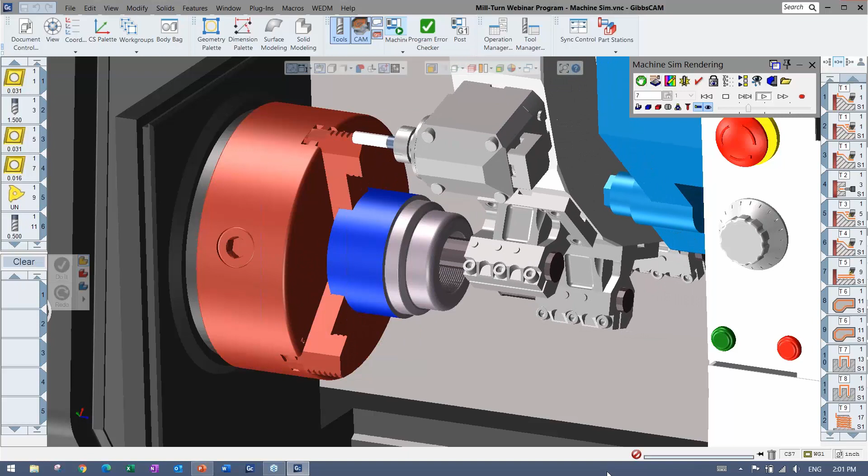I'm going to get right over to Gibbs here, and I have the part that I'm going to be demonstrating. You can see the full setup where I have a whole machine sim, the machine, fixturing, tool blocks, all the tools well defined. This webinar's purpose is just to show off how smooth and simple it is to go between milling and turning when you're using a machine like this that has turning but also live tooling in most situations. And in some situations, it can get even crazier with milling heads and lathes.

So we're going to focus in on a single turret and a single spindle, and I'm going to walk through and highlight all the little things. I'm not going to go too much into training mode here, I just want to get the point across of how it can be used, and we can go from there.

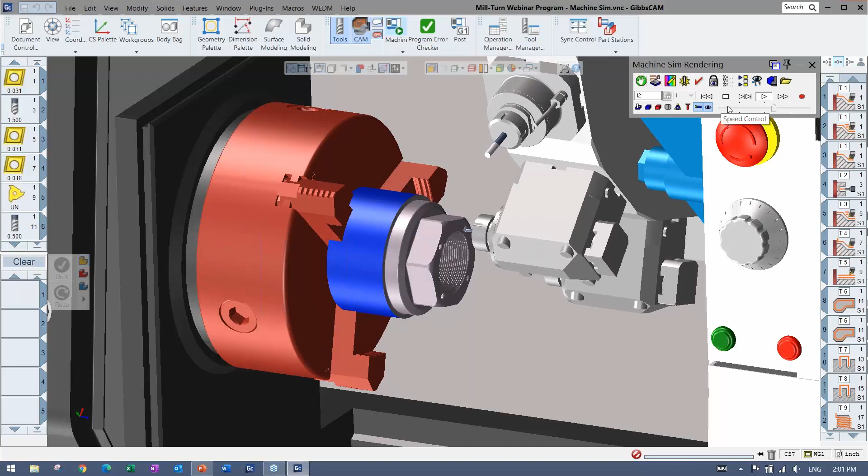The simulation itself, I'm not going to have that in the file right away, but you can get an idea here where it's really ops on the face, the OD, anything that you would expect to see.

All right, so I'm going to open up a file. I do have files that I'm going to be loading just to keep things smooth and running on time here. So the file really doesn't have anything done to it other than I've selected the machine quickly, and I've put in the stock and clearances.

I've even brought in a fixture here just to show you that you can do that. Bring in a model, download it, whichever, very easy to use. And you can hide it, it doesn't have to be shown at all.

All right, and I'm going to bring in a part as well. The part, when you're cutting something, can be a model like I'm going to bring in. I'm just going to import my part in here, and you'll see a solid representation of it.

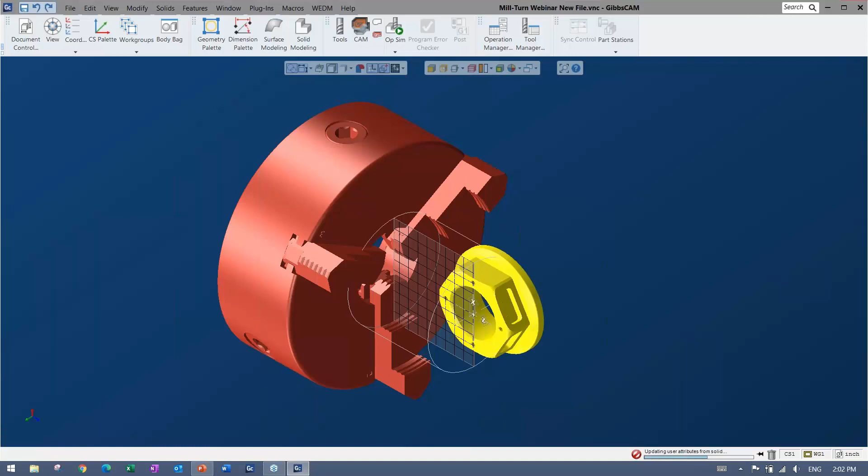But you can import wireframe geometry, you can draw wireframe geometry, you can dimension, model, all that can be done in GibbsCAM. So wherever you end up starting, you'll have something to cut in the end and to apply the actual tool paths to. You can see here everything's nicely defined.

Now once you have your part in here, there's lots of very good display preferences. You can hide things, show things, colors. Really the whole interface is very customizable.

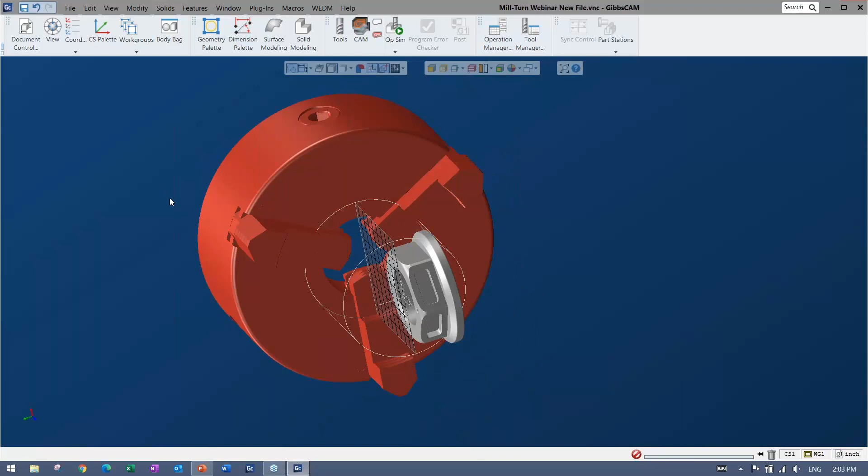Anything can be moved. So I'm using the default layout, but just know that as I go through, you can change it and add shortcuts and all of that good stuff.

Moving things around is also very simple. There's a view palette that you can use. I prefer to use shortcuts and my mouse or a space mouse. They're all available, and they can all be customized so that it's the same as other softwares too, which I find is very important when you're switching between them.

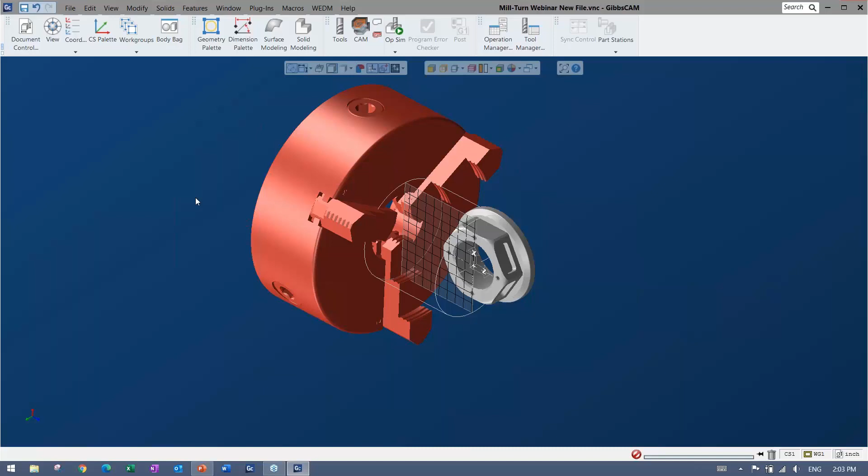Okay, so first thing I'm going to do is I have this chuck here, and I'm just going to send it to this thing called the body bag. So that's a little manager for the solids, and there's different levels as well that I'll get to when I'm engraving something. All right, so all the good stuff is there, and it's very easy to access here, even on the default layout.

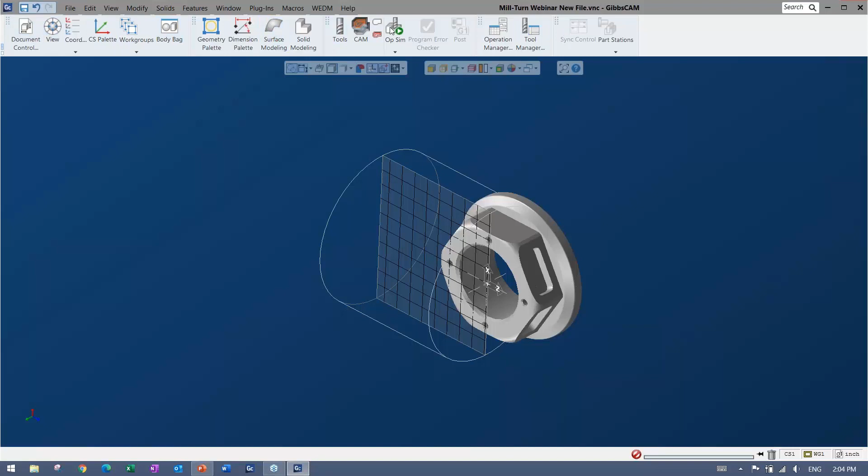Now, you can see my part didn't quite come in the proper way here, and there are plenty of tools to move things around, to locate your part, rotating, translating, all the good stuff, and some little shortcuts too. So this does come up for me, depending on how the CAD modeler has modeled things.

It could possibly come in the wrong way, and I'm just going to go in and bring up the CS list. So these are coordinate systems, and you'll see them come up again. But basically it's just a machining plane, and I can go ahead and maybe align this part to that plane, and it just takes some of the angle out of it.

Even if it was a severe angle, you could do a multiple lineup and line up to one plane and then the other, and then be ready to go and machine your part. So I'm happy with this, it looks like it's in the right orientation. There are plenty of tools to check it, but I know I'm good, so I'm going to go ahead with that.

Now I want to cut. So I have something to cut. Now I need something to cut with. So that's when it comes into the tools.

I find the workflow with Gibbs very easy to understand. It doesn't really change whether you're doing turning or milling.

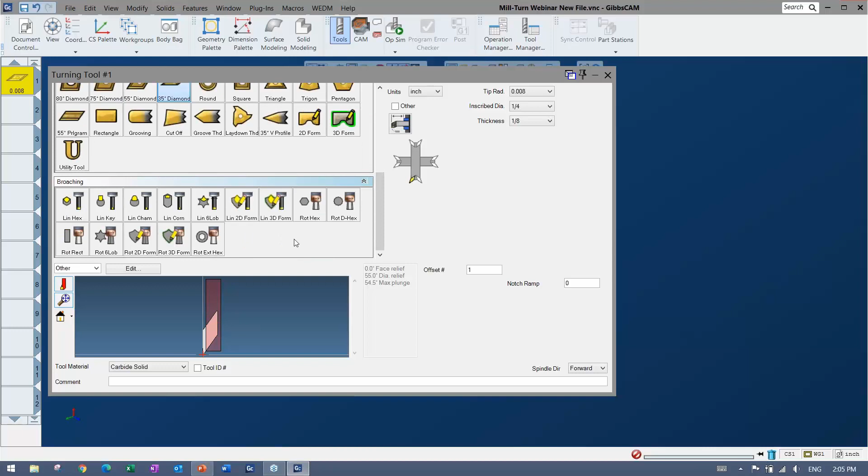You can see here that when I make a tool, the first thing you do is pick a tool form. In these cases we have some milling tools, so that would be live tooling in our situation. You have our turning tools, and we even have some broaching, linear and rotary broaching in there. All of these have a form tool equivalent, as well as the tool holders.

You can draw, import a wireframe or a model and apply that as your tool shape as well. Once you pick something, you fill in the size, fill in the holder information, and then give your offsets, and can give a little comment. Every tool is like that.

So if you're making a tool from scratch, it's very simple. It's easy to find your way around. Now, as you get into programming, the better thing would probably be to have some way to bring in tools. I'm going to be doing that coming up. So you can definitely load tools and all that good stuff as well.

Let me just pick maybe a standard insert here. Tool holder on it there. And you can see the preview is all nice and 3D as well. Boring bar.

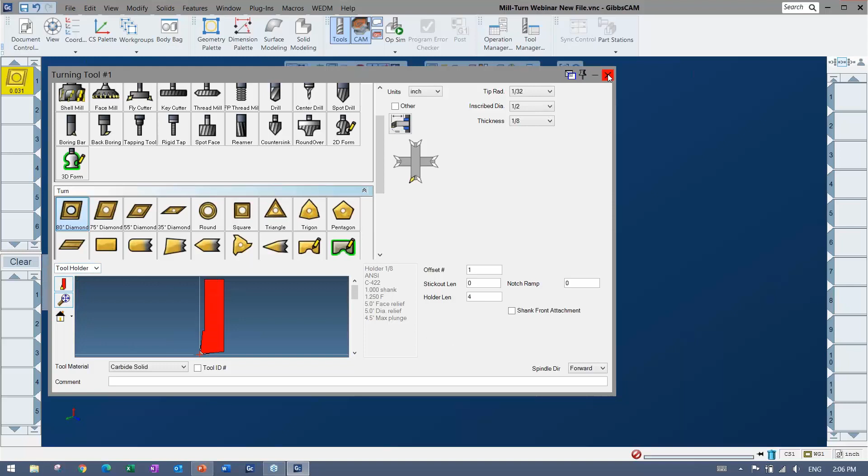So once you have a tool, whether it's a milling tool or a lathe tool, you bring it down to what's called the process list. And this is really where everything gets added together and set up before you actually make it into a toolpath.

Now, depending on your license, you may or may not have everything that you see on my screen. But this is how it works, where you either drop your tool down in here and get access to the process types, or you can go the other way around and double click here, select a process type, and it will filter through all the tools it thinks you can use.

And you pick it, and then it all gets there in the end to a dialog that would set up whatever your tool path process type is. So whether I'm doing a contour here or roughing, threading, there's elliptical contours. There's a process for pretty much everything.

So we're going to stick to certain ones here, but if you don't see the ones that you wanted to see, then obviously you can put in a question or ask your local reseller.

Now those as well are loadable. So the best way to do it, I mean, you have to make your tool most likely at some point, but I actually have my tools and my processes created, again, to keep things smooth and keep things under the time limit. So you can load tools here, and there are tools that you can save yourself.

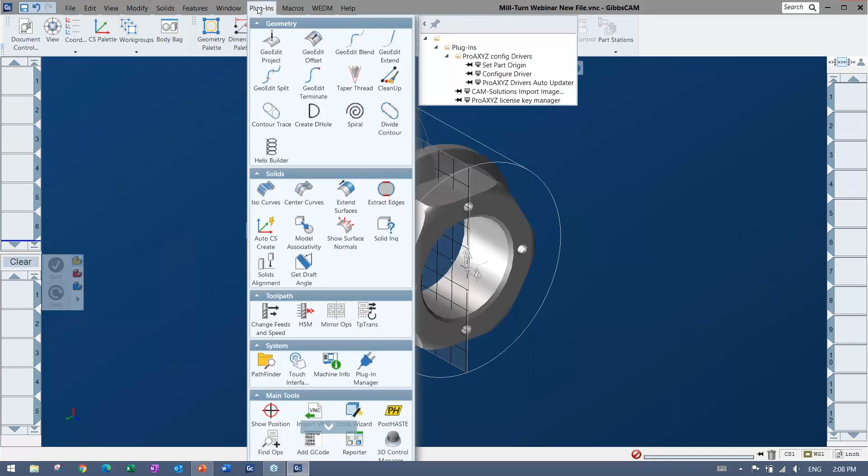You can also use different plugins, like Sandvik has CoroPlus. There's also the Helical Solutions and the Harvey tool libraries here, and some other solutions for that as well out there. So in that case, maybe I have a process already set.

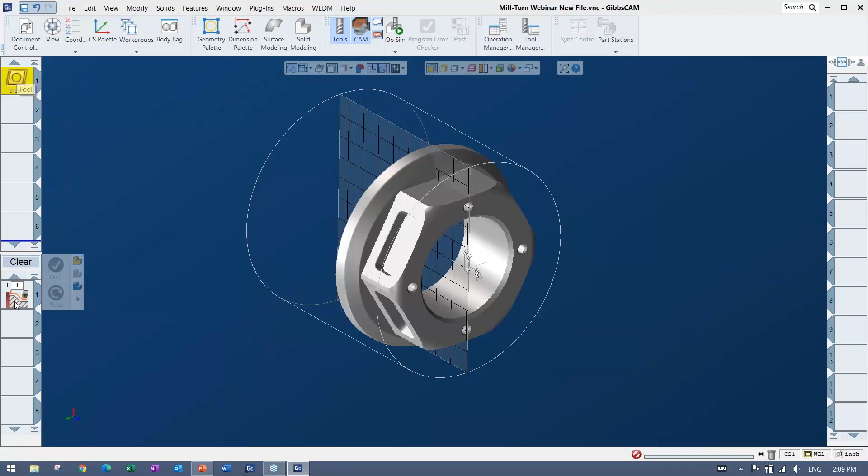You can see here I've created a folder, just Mill-Turn webinar, but I'm going to go ahead and load out of that. You can make your own folder system by machine, by material, by tool type, whatever you'd like. And when you load it in there, if I load a tool, I get the tool. And if I load a process, I get the tool along with all of my parameters filled out already. That could be anything from feeds and speeds to what type of process or cut you want to do.

So the one that I've imported here is the facing process. We're going to put that onto our model. Again, the workflow is always the same. You'll see as I go through: make tool, drop tool down, pick what the tool does. You get a dialog, everything's all in that dialog—no hunting around trying to find different things. And once things are filled out, then you can apply the actual toolpath to the part.

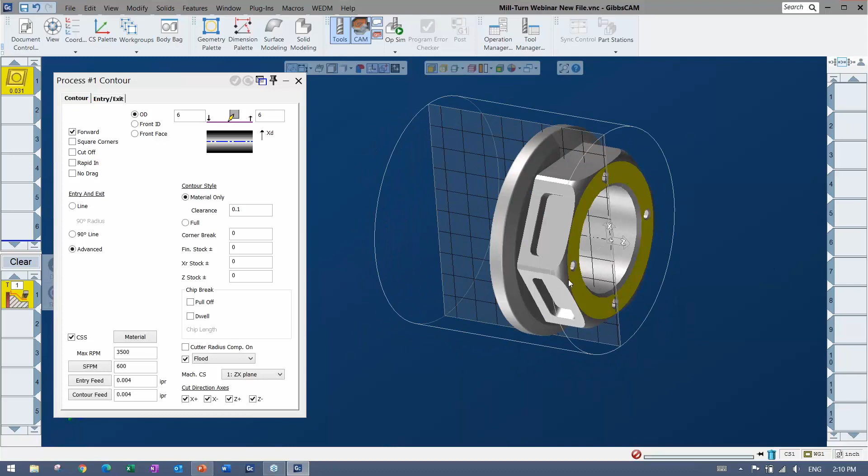So that's the place I am at right now, and depending on what process you use, there's different things to select. I could be selecting the model, or selecting some wireframe geometry. I may extract some geometry from the model. If it's already drawn, I can use that.

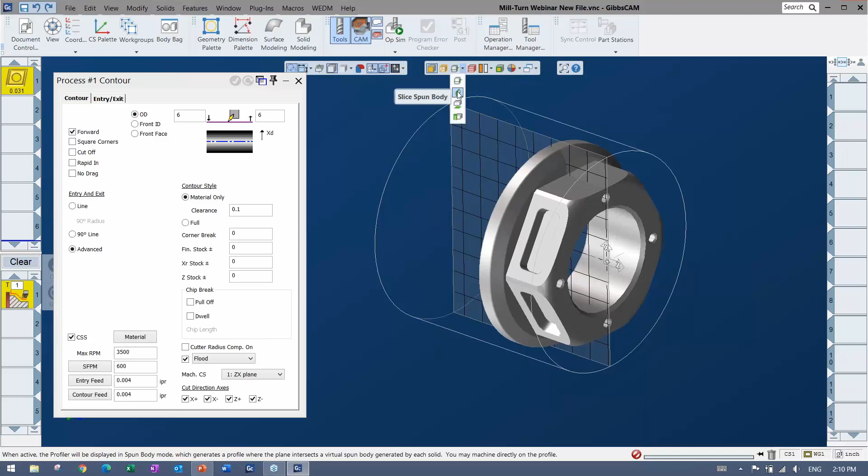In this case, I'm going to bring up something used to turn on solids. It's called the profiler, or the slice plane, and it has a certain mode. If you see the slice plane as it is, it slices through, but that's not really what I want to use to turn this part, because if I turn this, it's going to gouge in the higher areas.

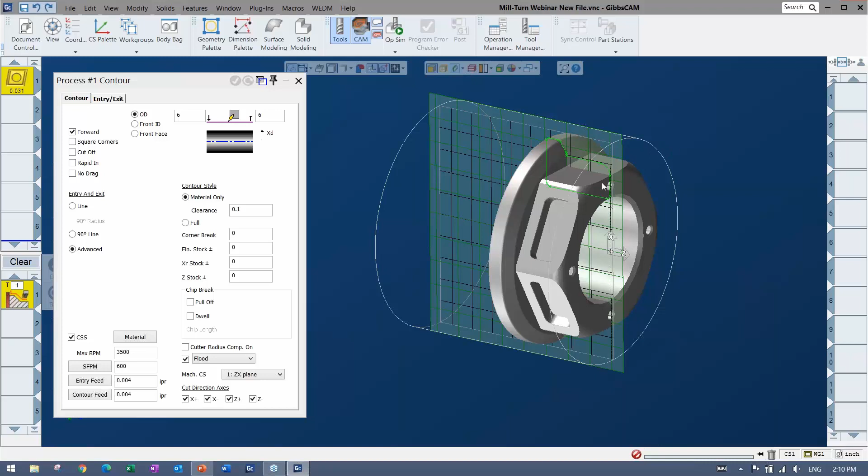So what I'm going to use is slice spun body mode. That one's great because you can never bring that slice plane off zero, off the center, so you know your diameters are right. You can also see it's showing all of the highest points, and getting rid of anything you can't hit while the part's spinning, like these holes are not being sliced anymore.

You can extract geometry off of that, or just go right in and use the profiler. That's what I'm going to pick for this specific toolpath. So a contour or roughing, anything with a specific shape, is usually going to need some kind of a profile like this or a model.

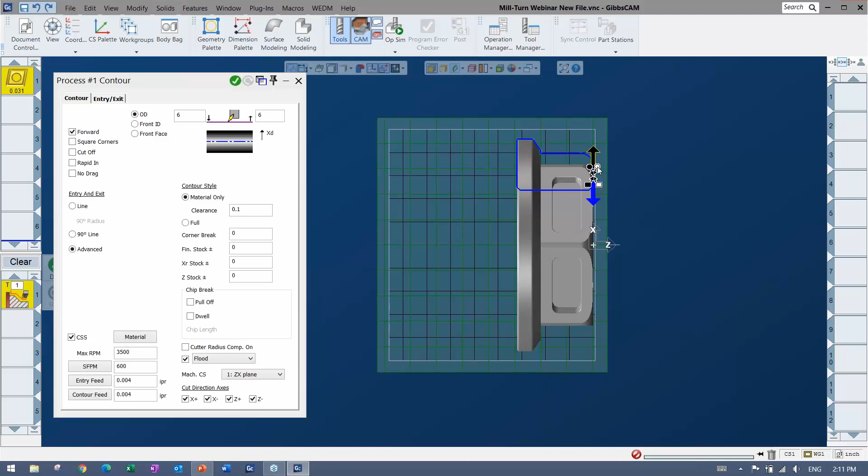Now when applying, our lathe processes use these start and end markers that are quite easy to use. That's just about where you want to start and where you want to end and what direction you want to go, and whether you want to go all the way around or one skim on the face, like this.

I'm ready to do the toolpath right now, but I'll mention you can move these by specific amounts and all that. I'm just going to place things where they are and rely on this material only to prevent any air cutting. Even though I drag this up here, when I do the toolpath, you'll see it avoids that.

Now once I'm ready to make the finished operation, notice my list over here, the operation list, is empty. So I'm going to go in and either say do it, or anywhere I right click, there's a do it. If I click that, you can see the toolpath appears, and I have my finished operation on the side.

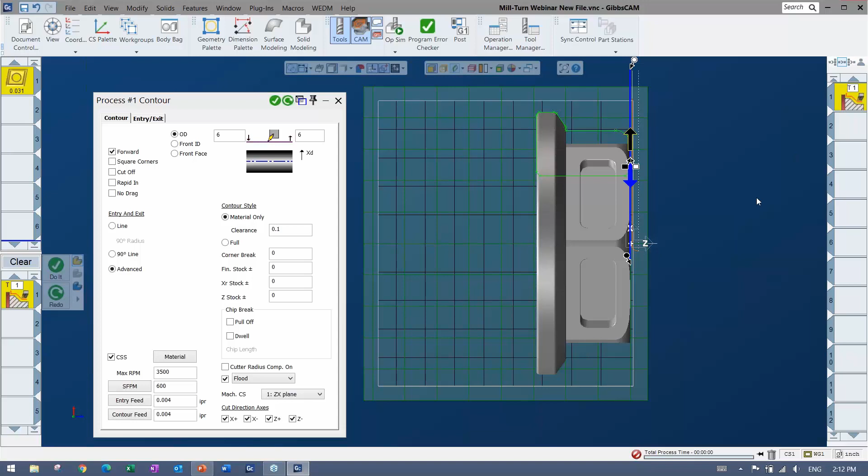Now if I wanted to change something about this, that's when redo comes up. There's redo, which will recalculate the toolpath based on whatever changes you made. So if I didn't want to go down as far, you can see that it shortens that up. But once again, it knows there's material being removed, so even if I drag it past that center mark, it doesn't go past. I can always override that as well.

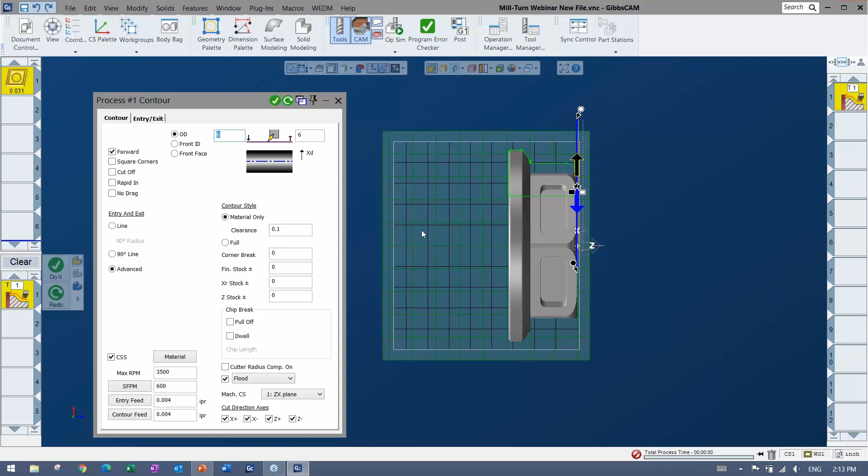So that's the gist of adding the toolpaths, and I'm not going to go into much about what each thing does, because I get into training mode sometimes. But I'm just going to clear this off and go ahead and check out the simulation now. So we have an operation, and I want to watch that.

So what I can do is start my sim, and there's a couple different simulation modes. There's the one with the whole machine and everything, and then there's the one that back plots. You can rewind and play, and this one's also nice, called OpSim, which will show whatever you want to play with, tons of useful options. I'll bring them up as I look through the rest of the toolpaths—stopping anywhere you want, different colors, checking to see if the simulation matches the part, etc.

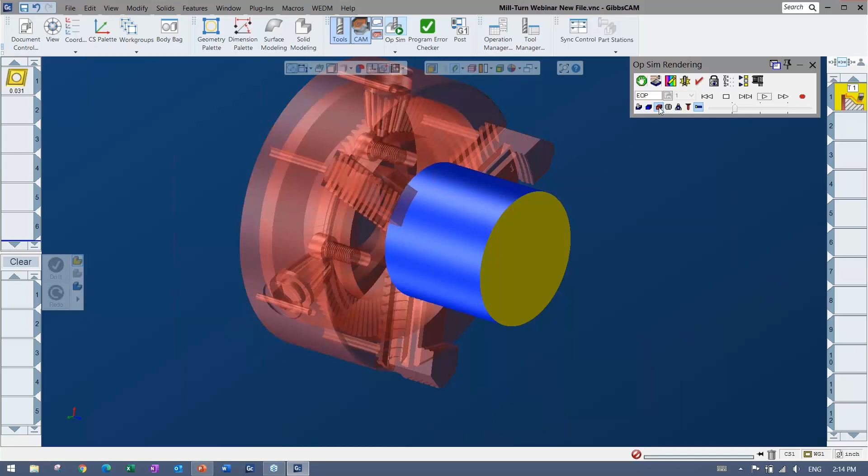You can see, even though my fixture was hidden there, it's showing in the sim, and I can always turn that off as well, or make it transparent or anything like that. You can see I have every little part in there of that fixture.

So I'll pop in, and you get to the point where by just looking at the toolpath that's probably going to be fine. And if you see a little line going right through the part, then that's probably when it's bad, but I'm going to try not to do that.

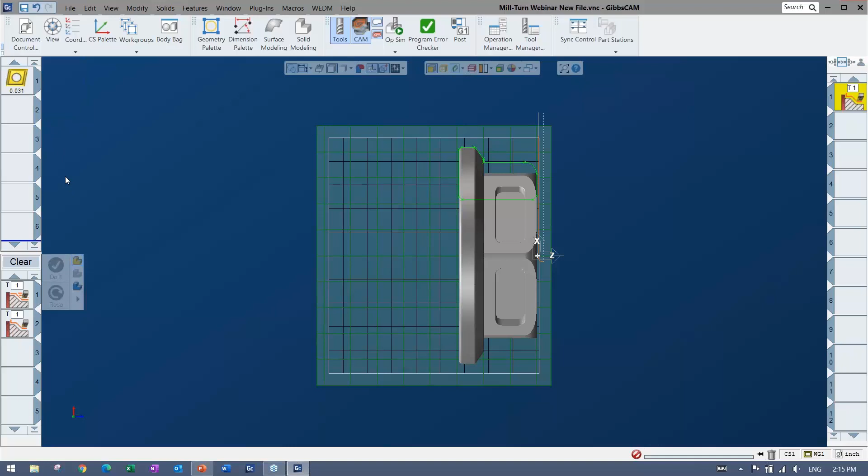All right, so I'm going to load a couple more in here, and again, not going to dwell too much on it, but here's some roughing and finishing, let's say. You can see these are stacked together, and they'll apply to the same selection that you make. You can do roughing and finishing tools separately, but here you can see that one's using the same tool and it recognized that, so it's not going to make me another duplicate tool. This one's going to go ahead and rough this in.

All right, so I'm going to start picking things out here, and depending on what you want to rough, there's little shortcuts. You just do something like that, and that selects everything that I want to cut. And I can say do it, and you can see it generate the cut there. I have 2 more operations.

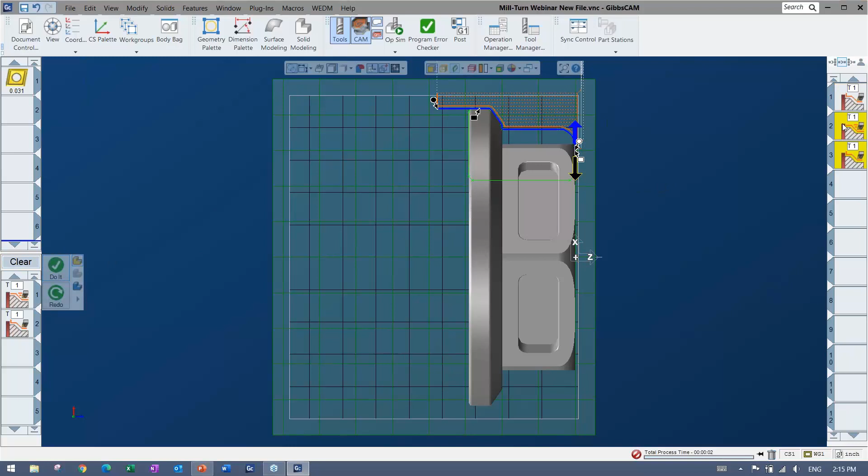Again, I can pop open the simulation if I want. I can play it, and I can check, is that okay? Anything crashing at all? I actually put on this one, it's hard to see, but there's a chip breaker. I thought about using the pull-off, but there's lots of options in there once you start digging that you can use, but nice and easy.

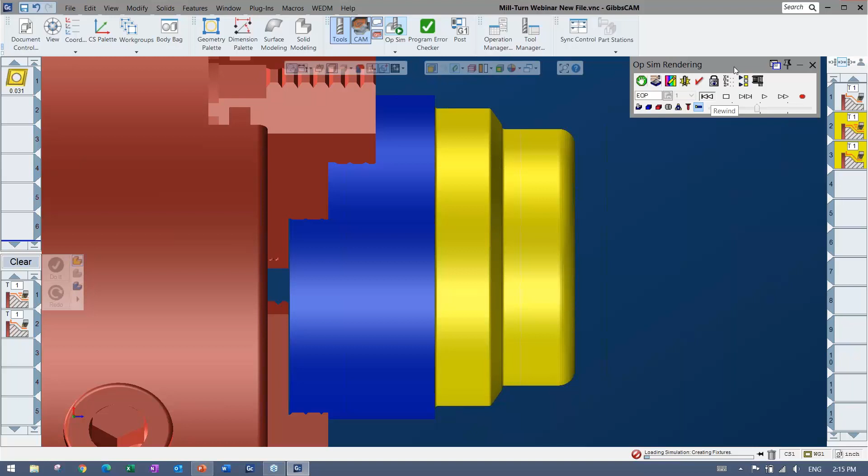I got my thing, my OD is turned, my face is turned. Again, this is a demonstration, so don't give me too much stuff about the actual methods. I might cut things differently in other situations, but let's move on to doing a little bit in the middle here.

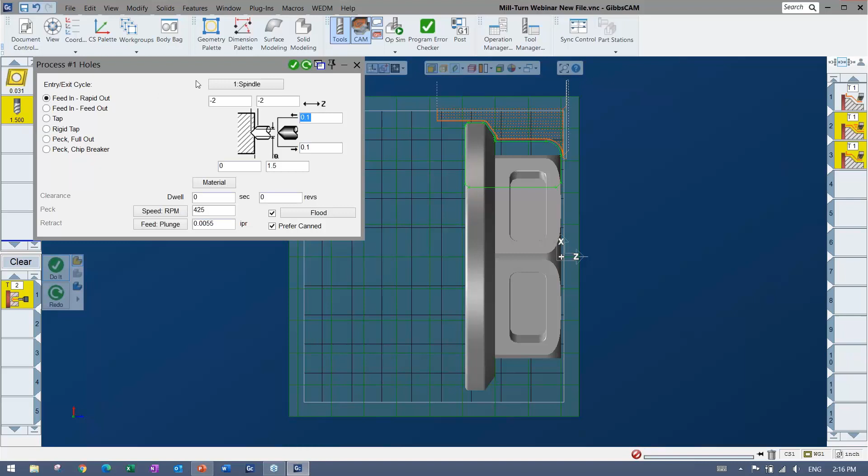So here's an example of one process that doesn't even need anything to be selected, right? What it is, it's actually the U-drill in this case, but you can see here when I have a tool that can do both, I have live tooling drilling, and then I have on-center with chuck spinning drilling. One's going to give me the on-center, and that one obviously can't go anywhere but on-center, so I can just go ahead and say do it, and I don't actually need to select anything.

I'm going to go ahead again, maybe I'll do some rough and finish and threading. These guys, if you're making them by hand, then great, but definitely save them if you can. If you use that same material, especially those same tools all the time, you can even have your whole tool list in here and possibly your whole machine sim set up before you even have any kind of thing going on, where you might have a template file you don't even have a part in and you never change your tool locations. That's all doable, all doable.

And here again, you can see the material only, picking up that there's material back here. And again, if I didn't want to go back all the way, I could always redo, just kind of shore it up, and it's very quick to just redo with a redo shortcut.

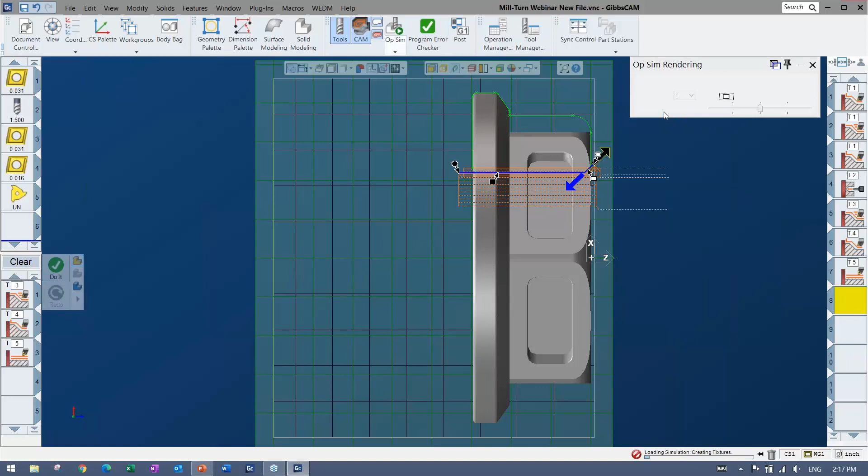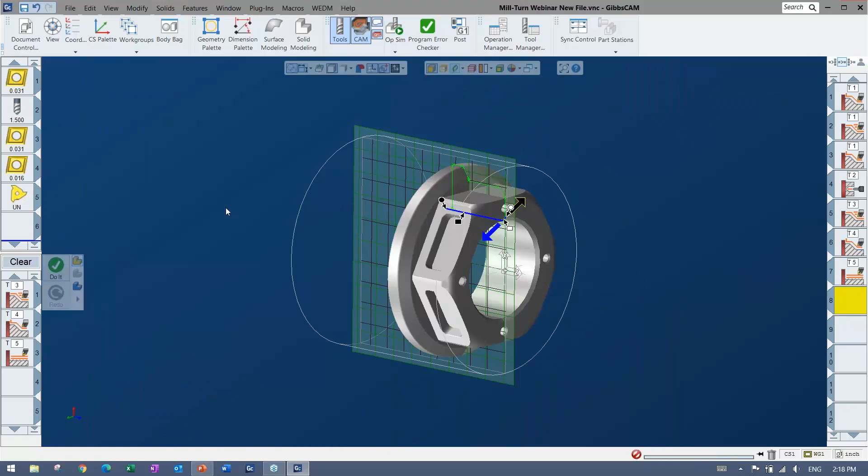Again, checking all the way if you want, or doing the whole program and then checking is perfectly fine. But for any inner diameter work, you can see there's a little cutaway, so I can actually see what's going on inside. You can see that, yes, that's cutting, and then obviously looks like the thread's going on in there. The transparency could also be used as well. I'll play it all a little slower when we get to the end there.

But next up, let's do some actual live tooling. So you saw that the turning was very easy to put on. It's just one plane, easy to set up. But I don't have to jump into another side of the program or anything. If I want to start milling, I can just go between milling and turning all I want. I can reorder the processes or operations if I don't like the order that they're in. Anything like that is doable. It's very easy, and reposting the code is very easy as well.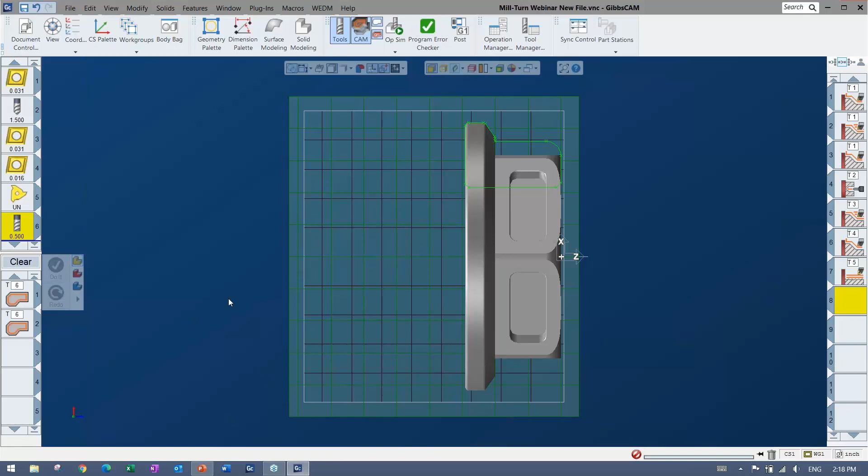So I'm going to go ahead and rough this hex out. In this case, I'm coming in on the face, and you'll see the tool is very easy. This is now a milling tool, but again, you're just picking the form and putting in the dimensions. Offset's a big deal, obviously, and tool holder can be in there. I don't have tool holders because the machine sim tool blocks are taking care of that. But this is the main thing I wanted to bring up, where you just have a little indicator where you want to point towards.

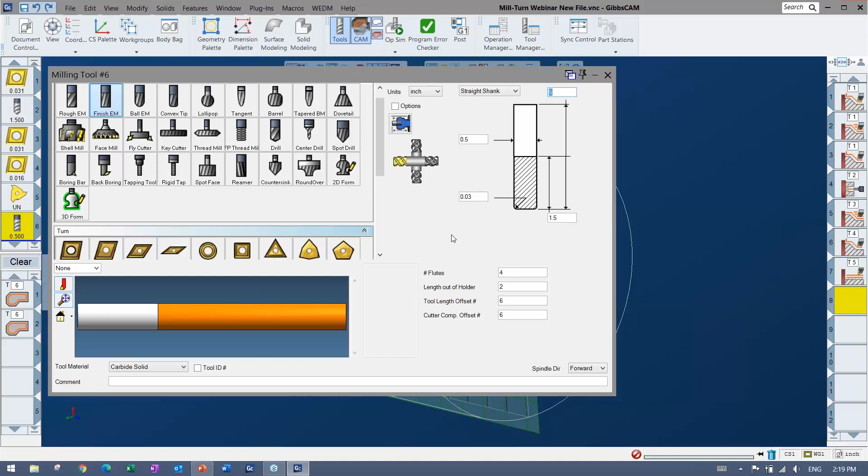And these ones kind of allude to some of the more advanced machines where you might have something like a sub spindle or a lower turret. So I have this guy pointing towards the face.

In my actual process setup, this particular machine - I can always make more CSs, but this one has CSs created already, and you can see that this is going to be done on the XY plane instead of the ZX plane. So I'm going to go ahead and say, get on the XY instead, please.

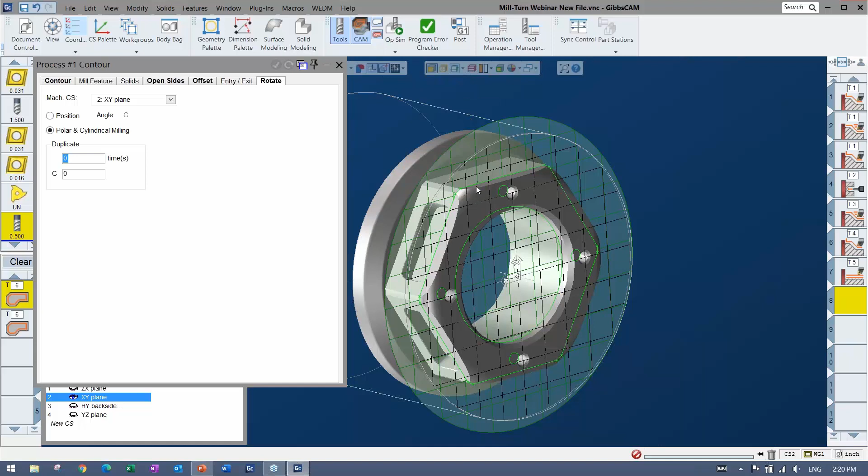You can see that I've also switched the mode to slice plane, so I can easily get this geometry. Maybe I'll just start here and end there kind of thing. Again, you can put them in precise amounts and all that kind of good stuff as well.

And when I do that, you can see it's deployed processes. Again, everything I'm throwing in are paired up, but they don't have to be. If you want to separate your roughing and finishing one by one, that's fine too. Or you can throw them all in there if they match, if they go together.

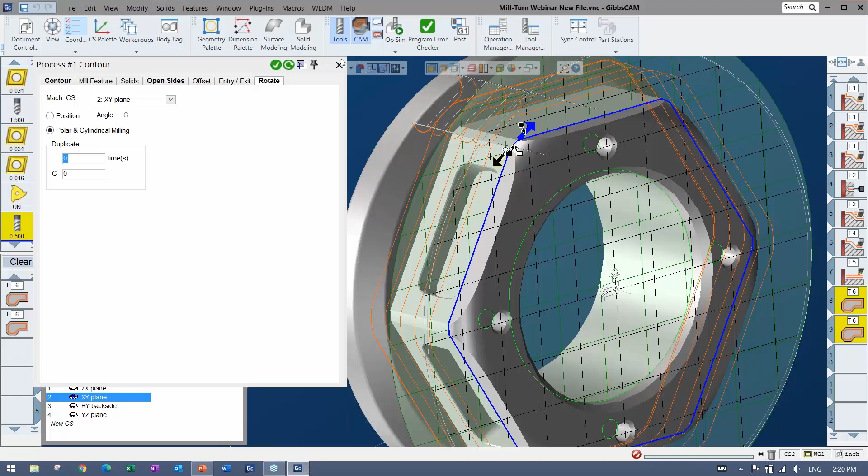Things like spot drill tap, and you never have to look up the pilot hole size anymore. It loads in with all of the right feeds and speeds and everything. So nice and easy. And that guy's going to hang out there, and once again, I can come in and simulate.

This is where we have a specific option that we could go between. So why don't I go ahead and skip to this operation? I could do a couple things - I could either select to just go all the way to this operation or buffer to this operation, or I could just simply play the selected operations here. I'm going to watch it.

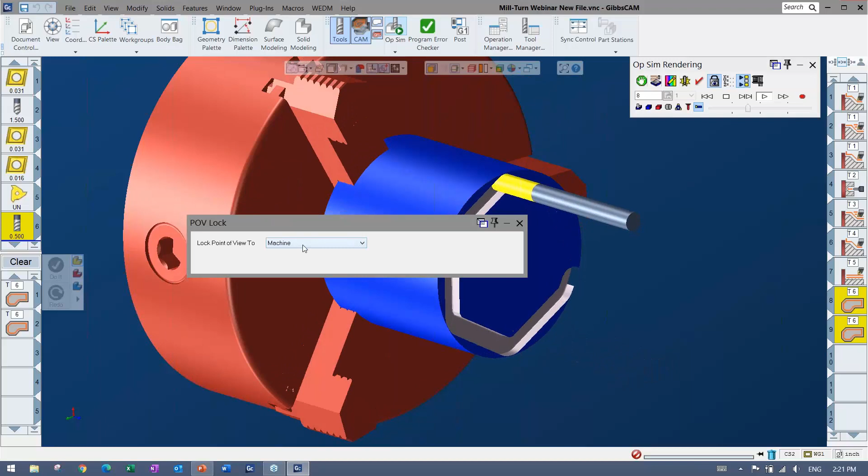And this is having to do with rotary milling, so this allows you to watch it as is if you want. Or I could go ahead and set it so that the machine is actually doing the motions it would do, and you have this, which would be the C-axis interpolating, and you're doing more rotary milling or polar and cylindrical.

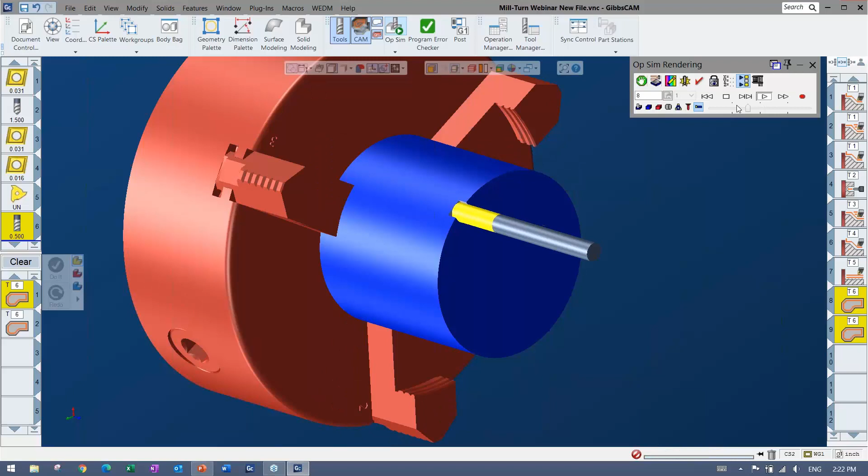Or if I wanted to change that at all, I can just come in here, and literally it's just one selection where I can set it to the position instead so that it does X, Y, Z if possible. You can say no axis movement - didn't have to repick anything, didn't have to do anything special other than that one option that I changed. Now it's using the X, Y, and Z, and you might use one day and one the other. It depends, and if you don't have a Y-axis, absolutely a must.

So that hex looks good. I have the rough and finish process there, so that should be good and ready to go. We've got a couple more holes on the face here. I'm going to come in here and do a little thread milling.

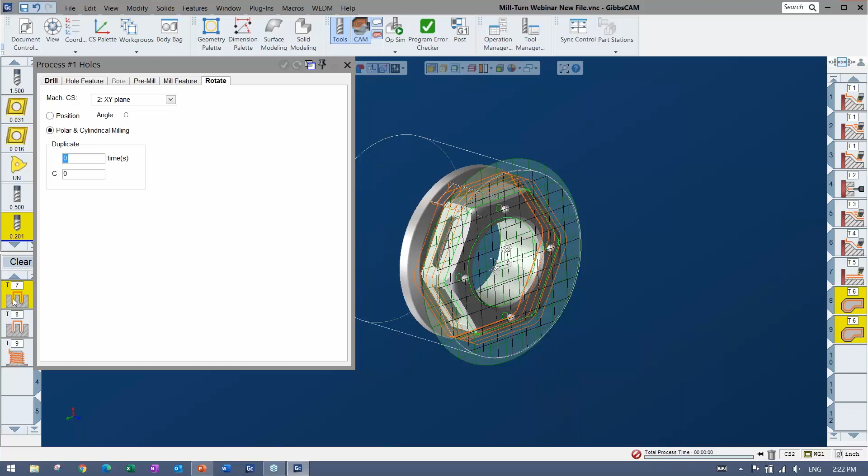Once again, just making sure we're on the XY plane. I have a drill, I have a chamfer, and I have a thread mill. I already have the profiler selecting what I need, so I'm going to go ahead and just grab those. And there you can see those three that went together and were already set up maybe from last time - I've just made my life a lot easier.

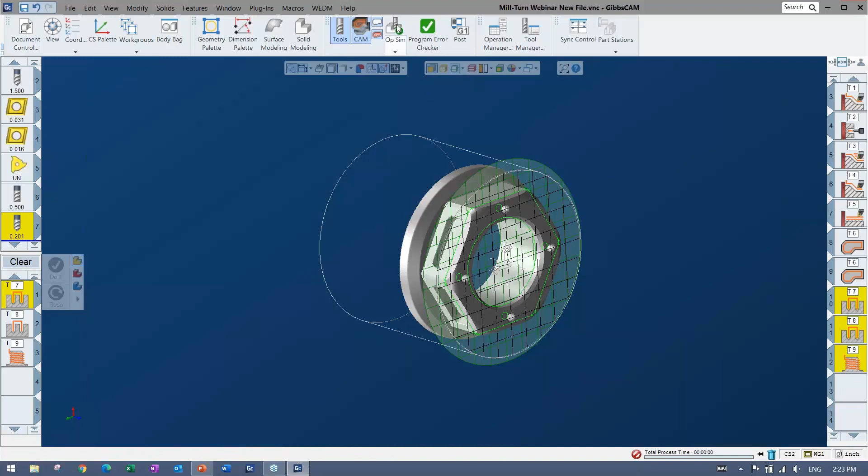Again, same kind of thing too, where I'm coming in here and I can simulate and watch and see if I'd like to change anything about it. But this again would be a good one to do the polar and cylindrical, keeping that turret up in the positive here and coming in, spotting, and then you can see here the full profile thread milling, which is another thing totally supported, very easy to use.

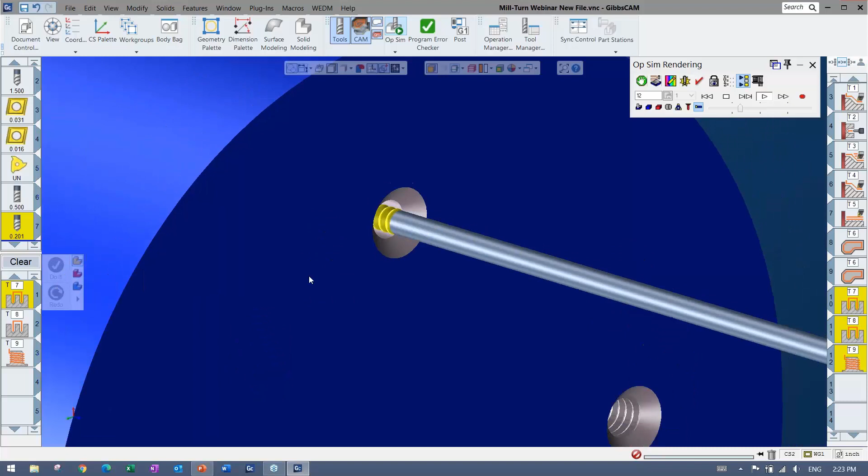Again, just making a thread mill tool, dropping it down, choosing thread milling, filling in all of the parameters. That's using the C-axis or the positional once again.

So this part's coming along. That's about all the face work I'll do on there, but obviously we could be also coming in on the OD, so I'm going to go ahead and load something for that. And the first one is the pocketing on the outside.

Once again, if we take a look at the tool, nothing really different about the tool other than it's a smaller tool, of course, but we have it sticking towards the OD now.

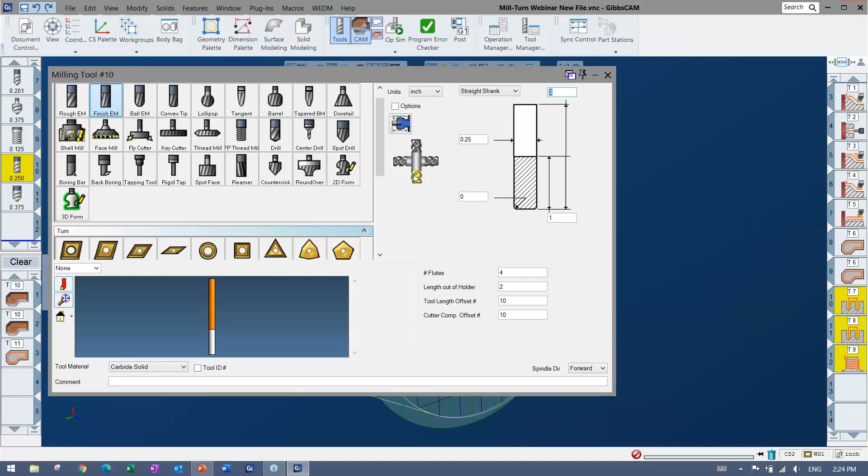The worst thing that can happen is it makes the tool path, then you simulate and see that the tool is the wrong orientation and you change it, or a warning comes up saying the orientation couldn't be achieved. So that's not a problem at all.

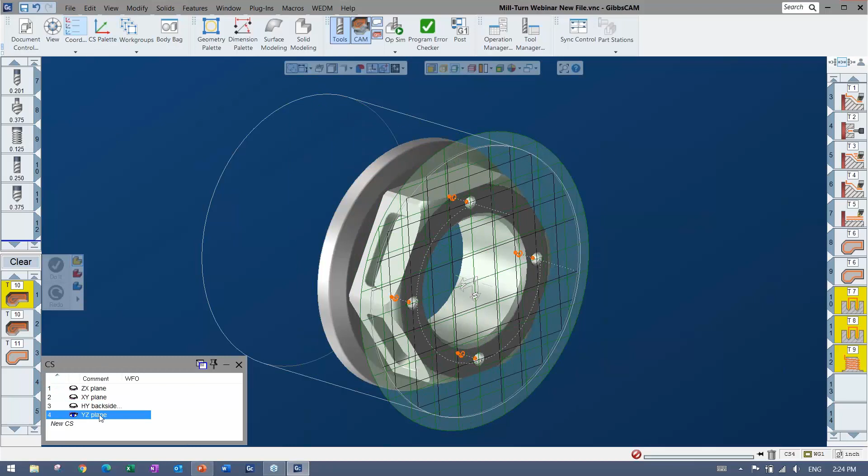Now, if I look at my planes here, I don't actually have a plane that would angle to that pocket. If I take a look at any of these, I'm either going to have to use an angle option that I'll show you in a second, or I can go ahead and make a new CS plane. It's very easy - in this CS list, I'm just going to hit new CS, and maybe I'll go ahead and call it pocket here.

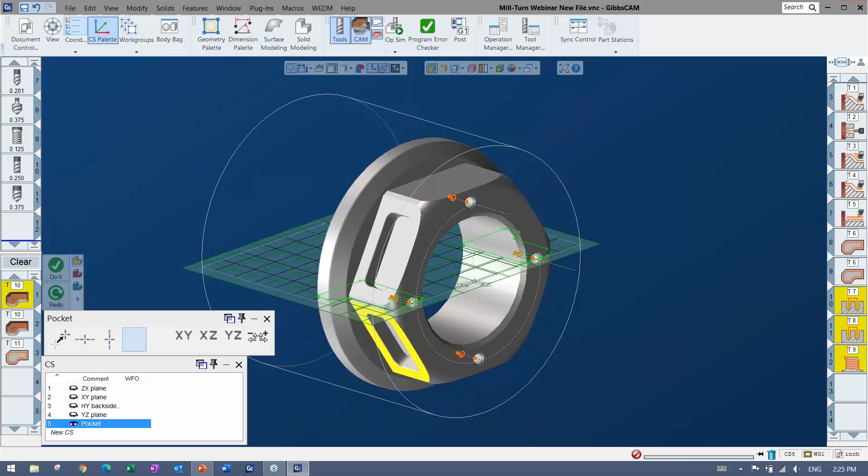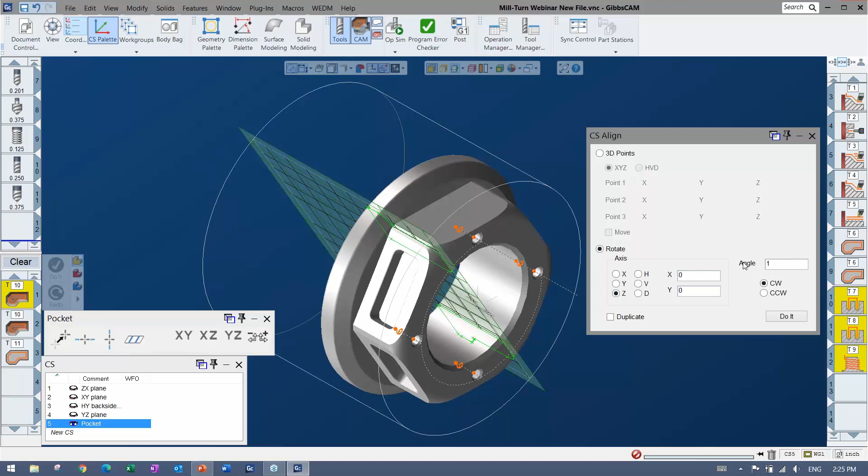I'm going to open the CS palette, which actually creates the CS, or moves the CS I should say, and I'm just going to go ahead and align it there. You can see, depending on what you have, there's a negative and a positive, so I can always flip, or go to the other side, whichever works for me in that situation. I could also do a rotate, maybe a 180 rotate around. You can see all I'm doing is putting that so it's on the positive side.

I'm going to do it off the ZX plane. Let's do that one there. Pocket. My profiler adjusts to it.

So I can again reposition that to take another slice of whatever I want to cut. And then inside of my process, I can say, hey, there's my pocket CS, or whatever you want to call it, the angle that it's coming in or what it's doing. Select that. And also notice that I have a duplicate here.

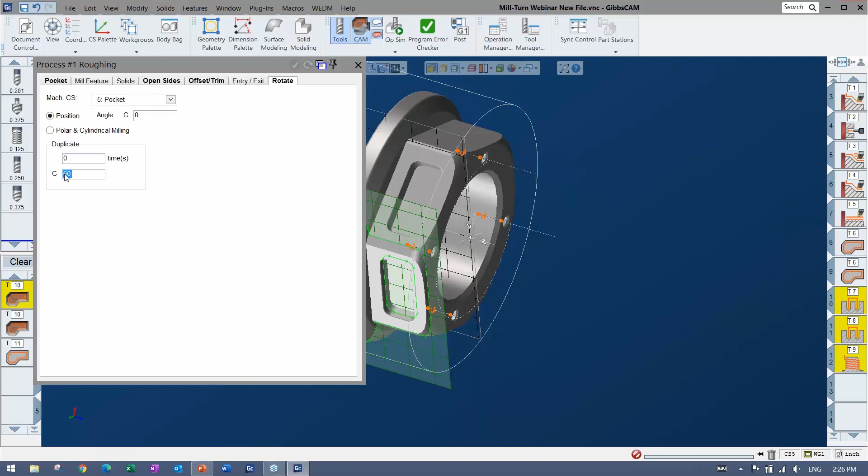So maybe I'll just do it without the duplicate first. Oh, and I still have a duplicate in the other one, but you'll be able to see here - I'll turn them off just to get the point across. But basically, however many times that pocket happens around this part, I can always say, hey, duplicate this same feature around however many times I want by whatever angle. It makes it really quick to create instead of doing another CS, even though that's pretty quick too.

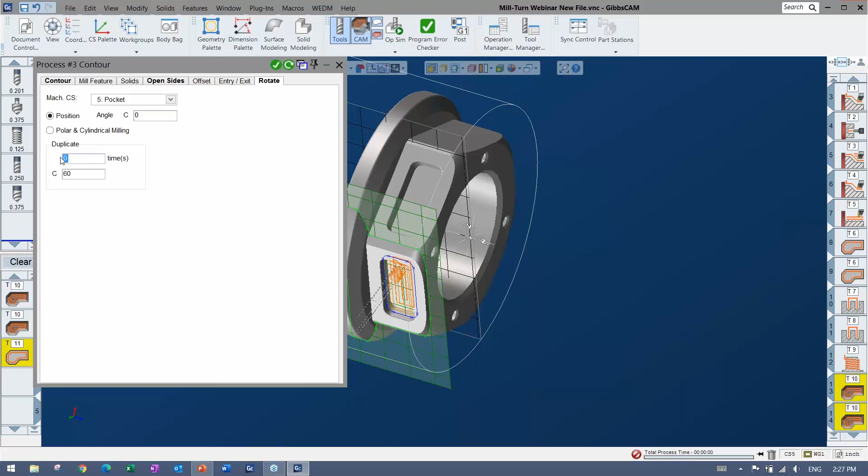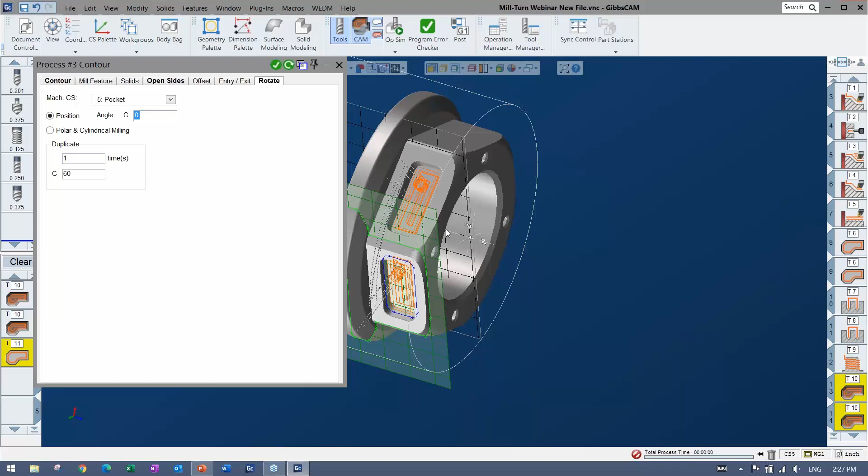So if I said 1 times 60 in these cases, you can see that's been duplicated and it will cut both. Now the order depends, but you can always reorder on the op side, or I can also put specific angles to start from. In this case, I actually have those same pockets on this side, and those are 180 away, so it's possible I could do a 180 here instead of a redo to create two more processes here. And I forgot the 180 in the other ones.

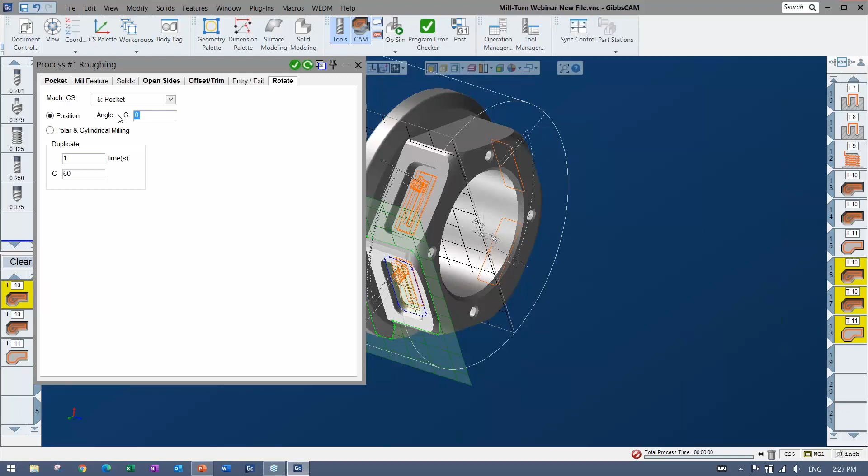So no matter what you were doing here, however many angles, if it's a weird angle, if it's not equalized all the way around, there's a chance you can get to it using this, or obviously the coordinate systems are always there and very easy to place, especially if you have a model.

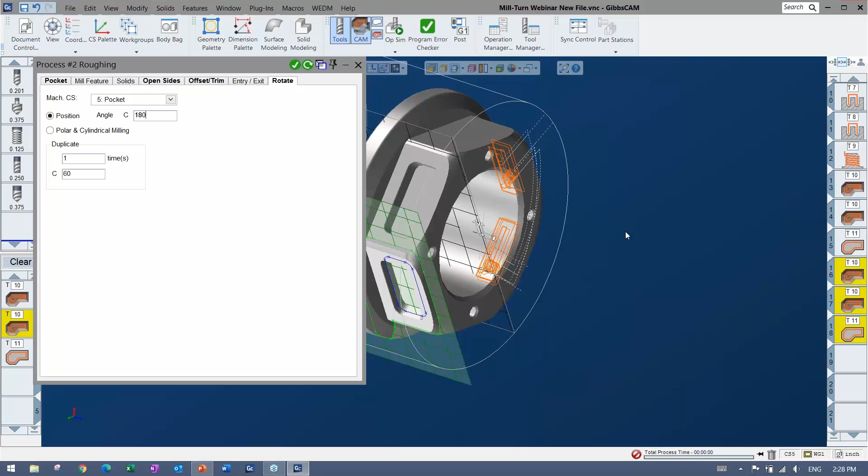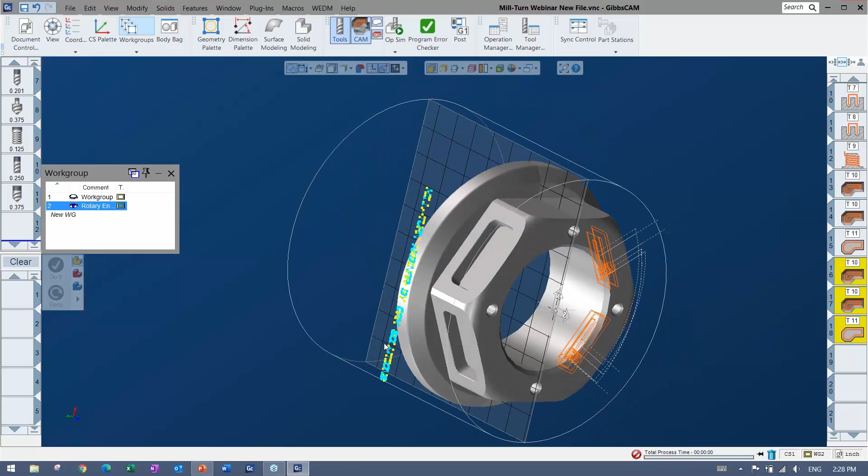Now, one of the last things I'm going to show you here are the rotary milling once again, and I actually have some text in a work group here. Here's some text going along there. I'm just going to switch over to that coordinate system and basically wrap this text around because I want that to be written around with rotary milling.

Very easy - once again, it's just like you're doing a straight contour, but you're going to be doing a polar and cylindrical. If I load up this rotary engraving, it's a normal, just regular contour, but I have polar and cylindrical. And maybe I'll do that one again, 180 from there.

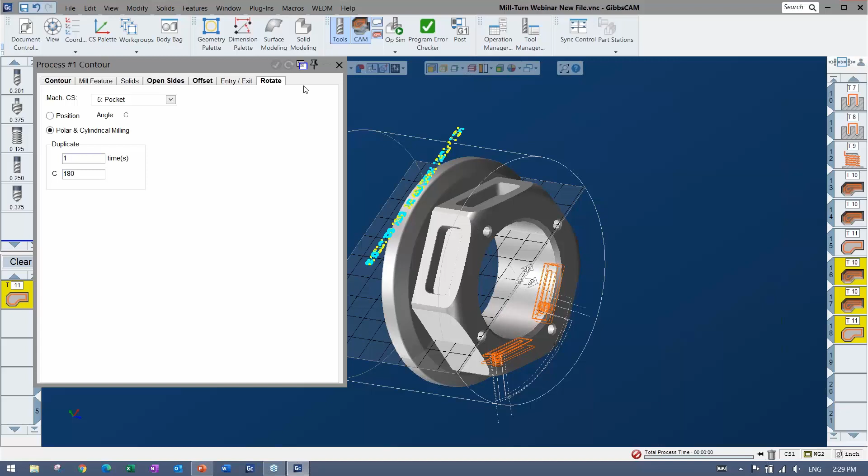And selecting, I mean, there's lots of different methods of selection. I'm going to just turn off the solid, let's say, and select like that. And say do it - that's going to write them all down and wrap them there around like so.

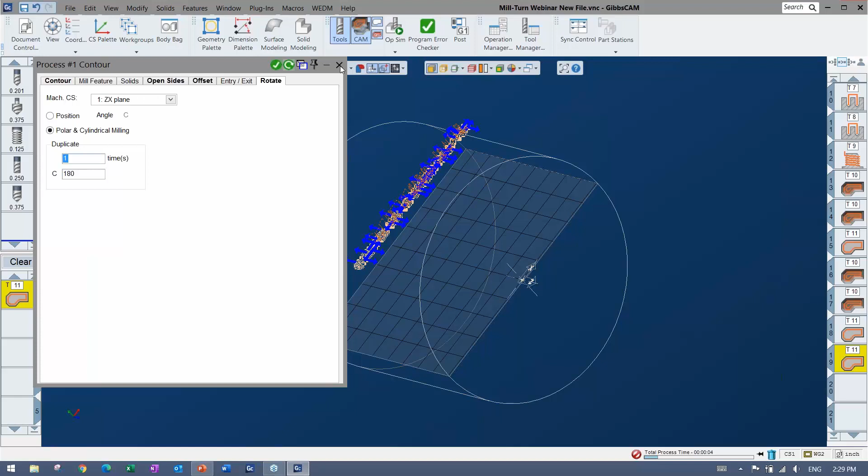So I'm going to go ahead and play out to that. Maybe I'll use this one for that. Again, I'm going to start or stop before operation 19, let's say, and I can turn that on, and that means it's just going to play as fast as I want. Then it will stop at that operation. There's also a way to buffer it in so that every time you rewind, it goes to that operation.

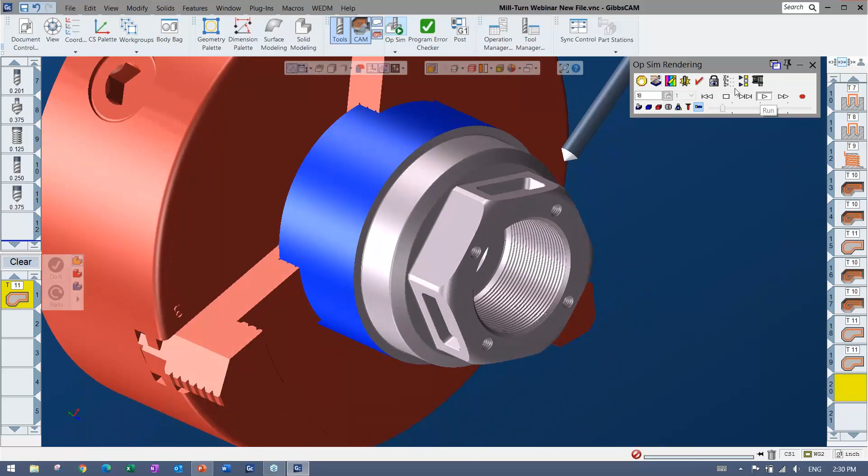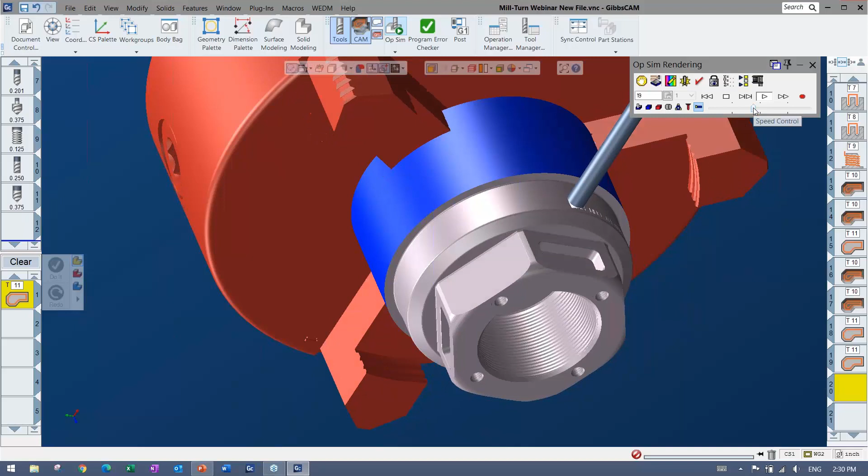Here you can see it coming around and doing some rotary engraving. There was nothing special about the text - there's a very quick text creation tool in the geometry palette. You just put it at the right radius. It doesn't even have to be wrapped - that's what polar and cylindrical does. Now there it's going to go ahead and engrave around there. And then because I duplicated one at 180, it's going to go ahead and cut on the other side as well.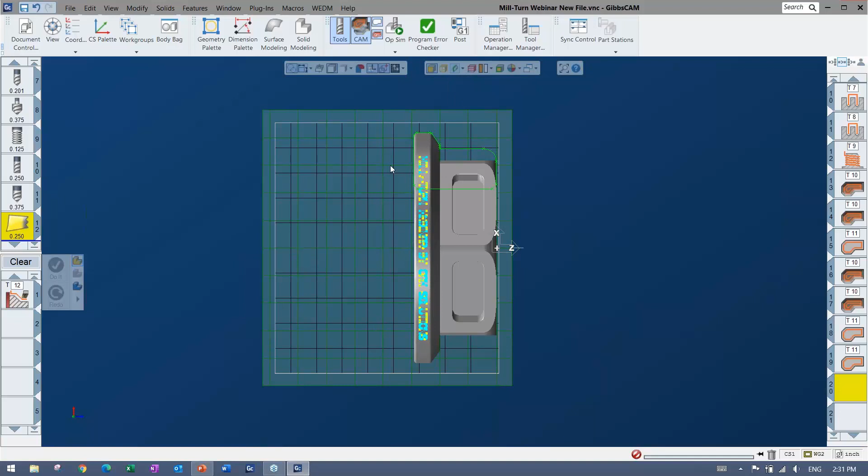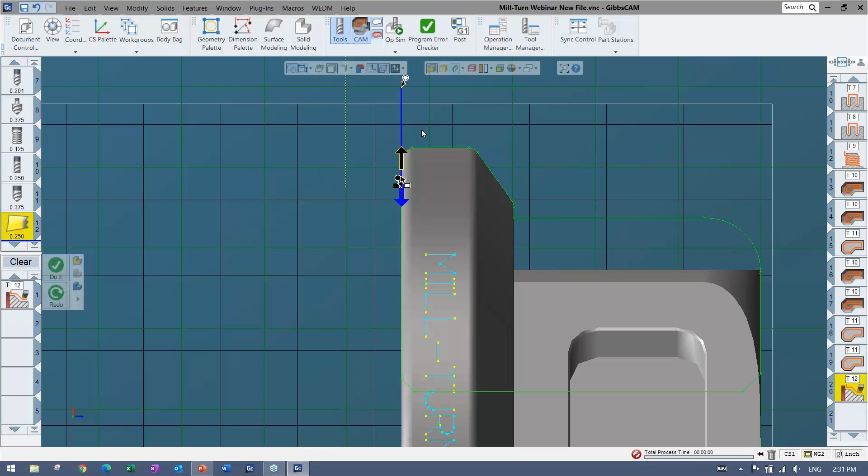Probably going to go ahead and grab my slice spun body again. I'm on the correct plane. I have a little feature here. You could leave material and finish up after, but maybe I'll come in, go this direction, down a little bit, make a little bit of room for myself. And I could maybe come in here. Different things like lead-ins, lead-outs, all that kind of stuff is totally doable. I could arc on or anything that you want there.

There you can see I have some part off thrown up there, and that's essentially my program. So why don't I go ahead and watch this one, and then I'll bring up the machine sim again real quick.

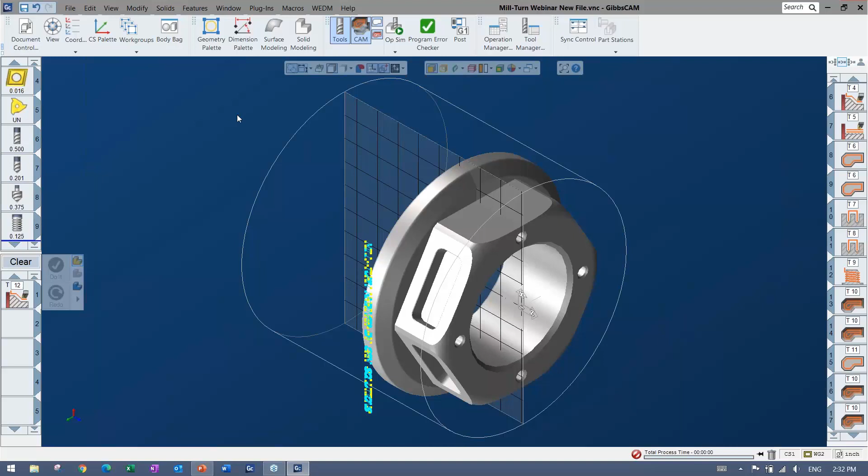Notice I didn't rewind or anything like that, so now it's going to just go ahead and move along. Oh, my bad, yeah, I did go a little bit too far past it, it looks like. I can throw a stop there. Let's do 20.

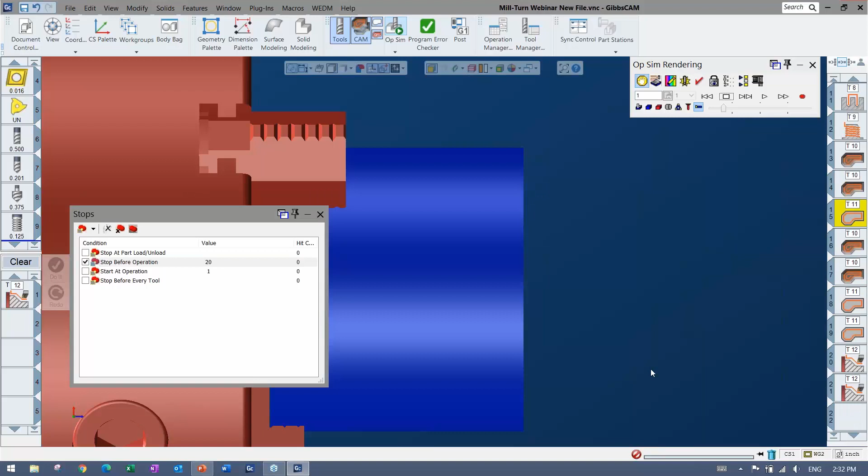Again, I do know plenty of people that when they're programming, they are programming with all of the machine sim and tool blocks and everything there. They may have that set up. I have a lot of people I know that have a specific setup and they don't touch it after that. So that's easy to do with a template file.

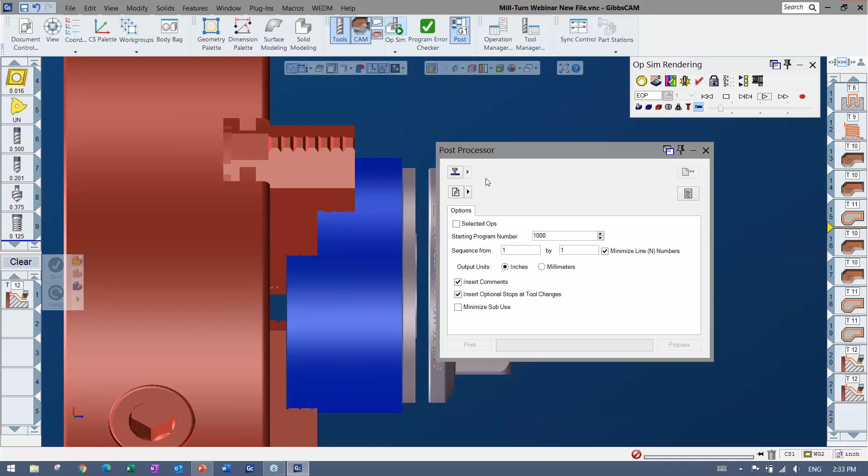So there's lots of things that you can do there and different machines it can support. Why don't I bring that up again? I'll save this guy, and I'll bring up the machine sim once again and just play that for a second. You're seeing a mill turn here, and this machine actually has a sub, so that's why you can see this. I'm just not using it.

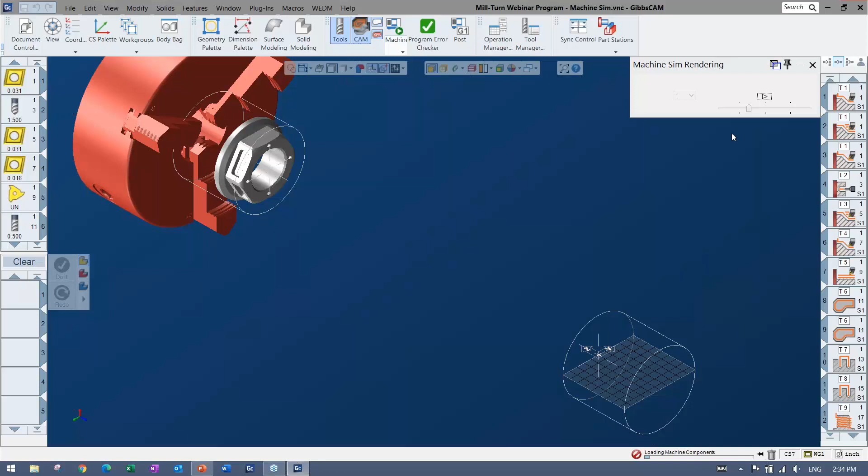But I'll bring up another machine sim there that shows you can really go up in advanced kinematics. GibbsCAM can support so many different configurations and different kinds of machines. It's all just about configuring the MDD, which is the machine side, and the post, and just getting things set so that it makes the right code every time.

Matches the simulation perfectly. You can see all the tool blocks. This is the whole machine in here with a control and everything like that, and you've got tool blocks on the turret here with the tools in it. It's very easy to add the tool blocks as well, especially once they're in there—it's just in the tool. You click, you say add tool block, and you pick the one you want, and the hangouts can come from that.

And anything I can do the cutaway or anything like that, here I'll move it along a little bit. You can see the C-axis doing its thing, thread milling, and then doing the pockets. Things are pretty close. I want to make sure that those things aren't hitting. So this is a good way to do it without having to sacrifice anything or having a heart attack at the machine.

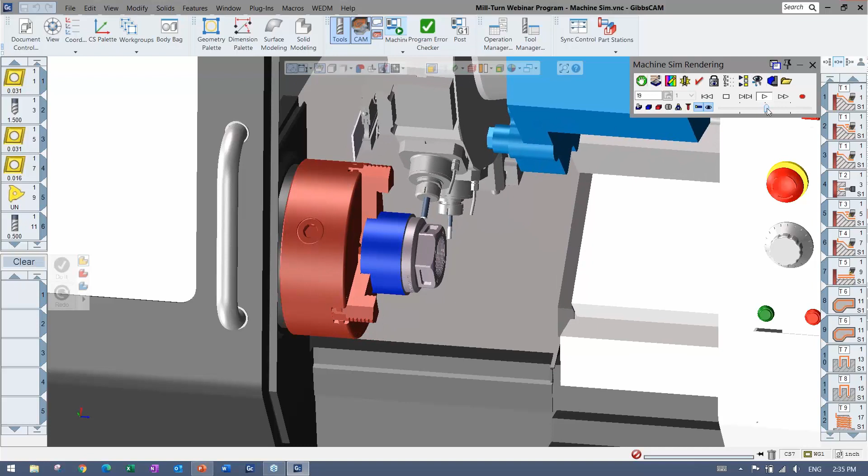There's the engraving, and then the part off. Once again, this one has a sub spindle. I'll bring up another one here that also has that, just a couple different options you could look at.

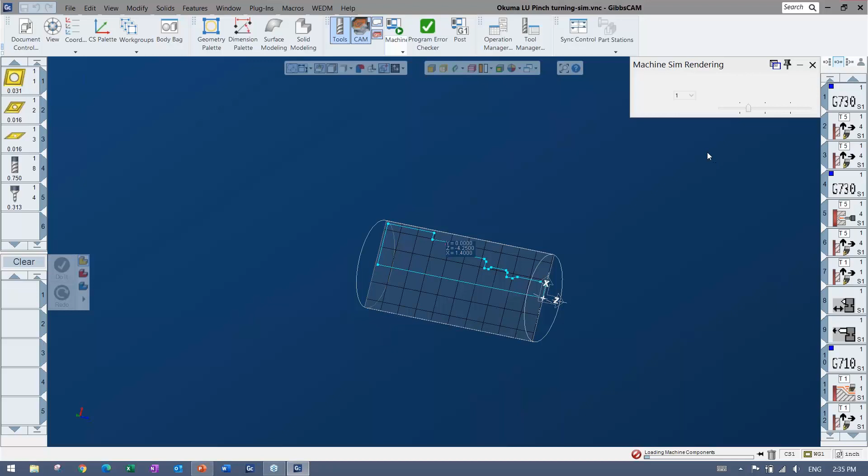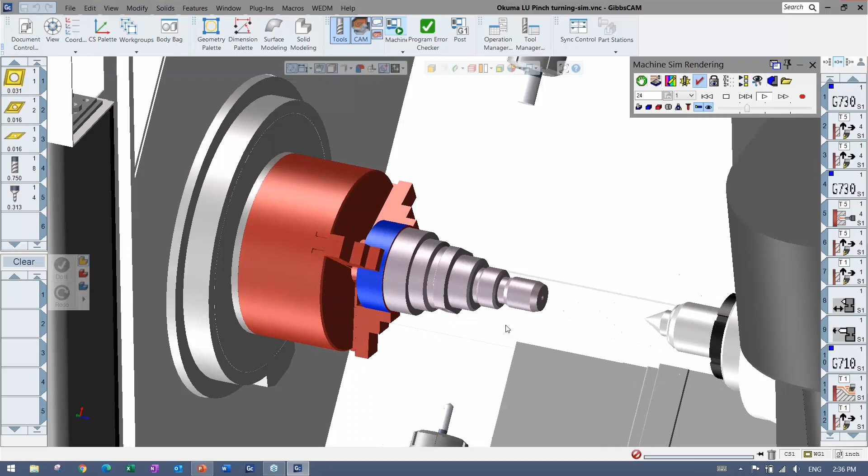And this would be more considered MTM, so I'm sure there will be or has been some kind of a webinar or video on that online. But here you can see a machine with a programmable tailstock, and it's got an upper and lower turret. It's doing pinch turning, it has wait codes. Things are overlapping operations to save time. So that's all pretty much equally as easy, I would say. Everyone has to learn something, obviously, but it's all supported, postable, full machine sim once again.

It's a beautiful thing.

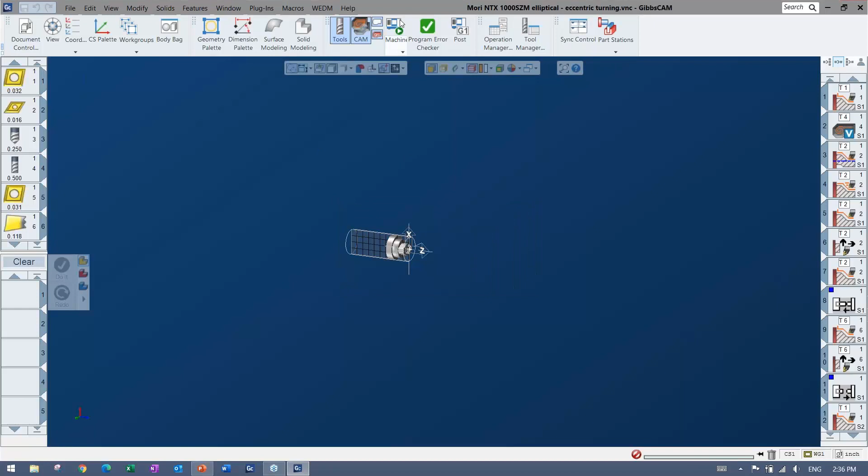All right, so that's really what I had to show you guys here. I'll end just with the B-axis. That was one that was requested here, having a full milling head inside your lathe. So I'll bring that up and then we'll move along.

So here you can see the B-axis here that can access the two spindles. There's a sub spindle here, there's a turret there as well that can be used. Everything can be synced up. You'll see some elliptical turning here, where it's using the y-axis, it's turning a shape, not just something that's concentric.

And it's going to turn that, it's going to turn some more. The sub's going to come in, going to grab it, going to go over. It's going to machine on that side, and it's all fully simulatable with collision checks and everything.